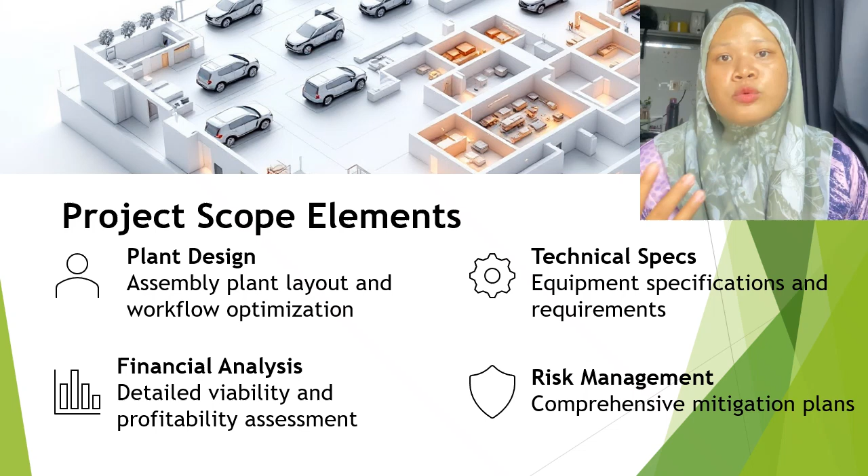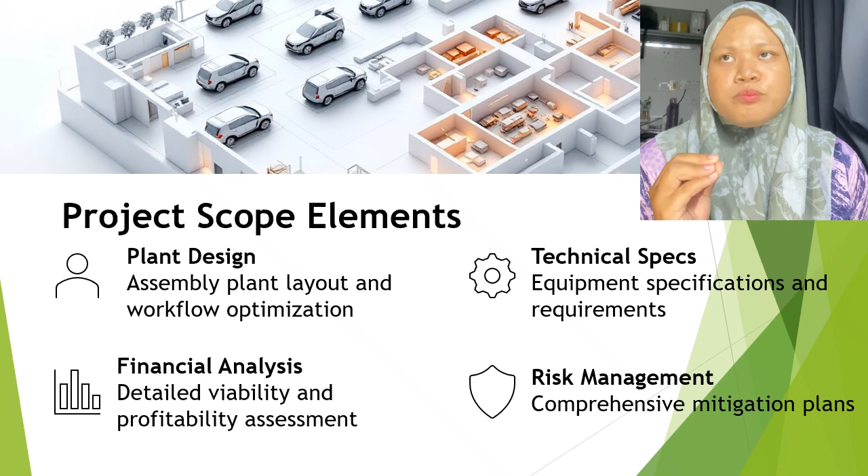Project scope elements: our project scope covers 4 key areas. First, plant design - we are focused on an efficient assembly plant layout and workflow optimization to minimize downtime. Second is technical specification - we are specifying all equipment and requirements needed for advanced EV assembly. Third is financial analysis - a thorough assessment will ensure the project is viable and profitable. The last one is risk management - we have a comprehensive mitigation plan to address potential challenges before they arise.

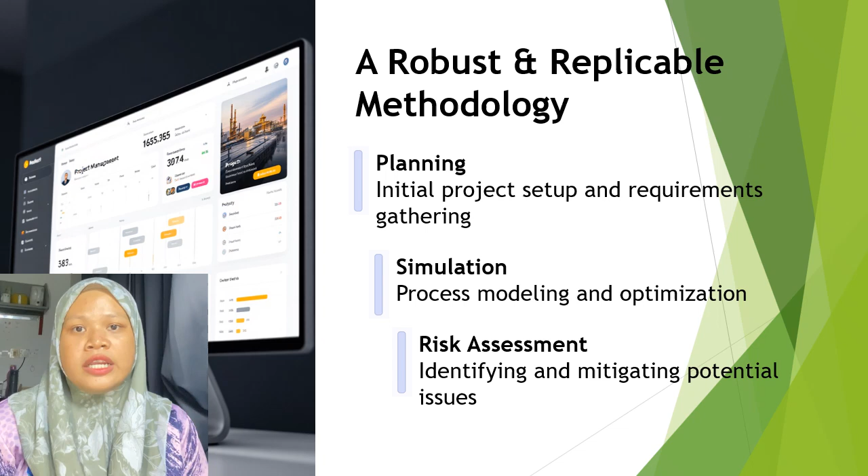A robust and replicable methodology: to deliver this project successfully, we are following a robust and replicable methodology. Planning - we start with detailed project setup and requirement gathering. Next is simulation - we use process modeling and simulation to optimize every step before implementation. The last one is risk assessment - we proactively identify and mitigate risks to keep the project on track.

Key tools and techniques: we are leveraging industry-leading tools. For project management, we use PMBOK 7th edition and Microsoft Project. For design and simulation, we rely on AutoCAD Plant 3D and FlexSim, ensuring our plant layout and processes are both efficient and scalable.

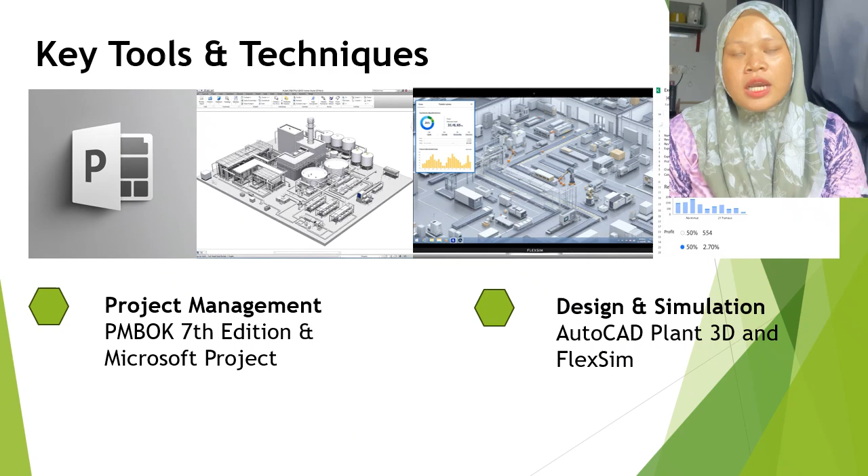Hello everyone, my name is Muhammad Jazmi Wimuledi and I'll be presenting the design of the EV assembly plant, focusing on 3 key parts: the plant layout, the essential capital assets, and the technical specifications for the major equipment used. Let's get started with the layout of the plant.

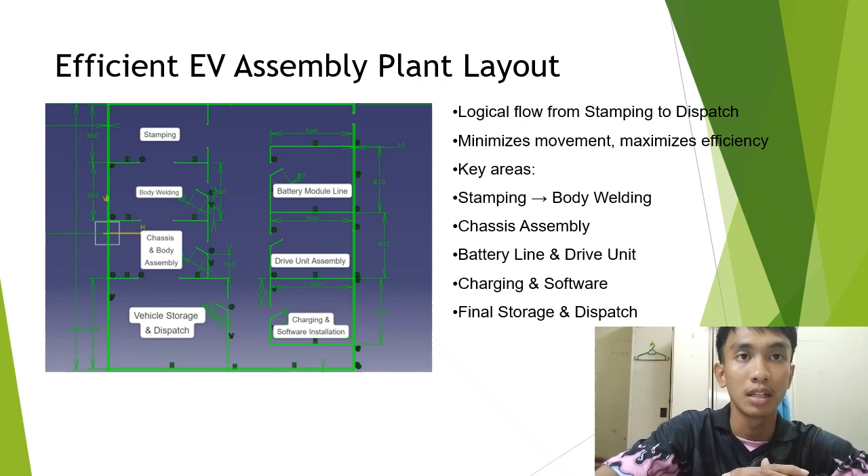This is our proposed layout, designed for a smooth and logical production flow. We begin with the stamping area for shaping metal panels, followed by body welding using robotic welders. Then the chassis and body are assembled in a centralized section. On the right, battery packs are installed, and below that we assemble the drive unit. Once the vehicle is nearly complete, it moves to charging and software installation, then ends at the vehicle storage and dispatch area. This design helps reduce production delays and keeps the process streamlined.

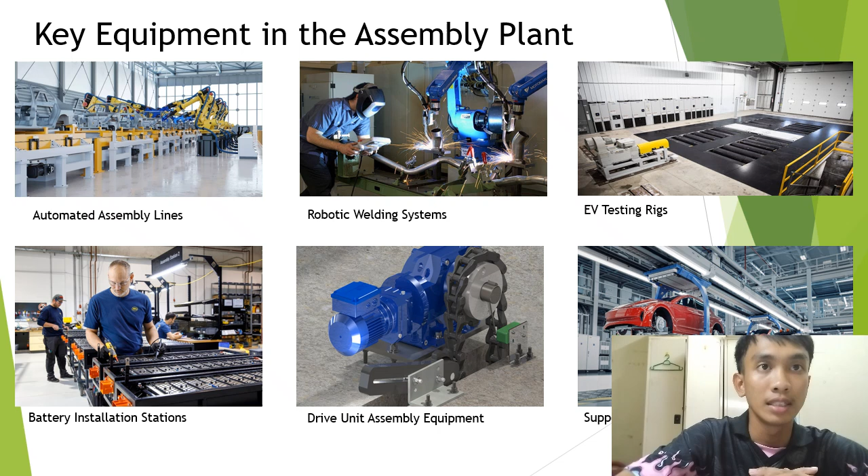Our plant relies on essential machinery to ensure safe and efficient production. We use automated assembly lines to speed up repetitive tasks and robotic welding for accuracy and worker safety. Battery installation stations are designed for safe handling of EV battery modules, and drive unit assembly tools ensure proper alignment of motors and transmissions. EV testing rigs are crucial to test brakes, electronics, and drivability. Finally, utilities like HVAC systems, compressed air, and fire safety equipment support the whole facility.

Here are the technical specs for our main equipment. The ABB IRB 6700 welding robot delivers high accuracy and speed. Battery stations are semi-automated for safety and handle around 30 modules per hour. Drive unit assembly tools help align electric motors precisely. Every car is tested for software, braking, and drivability using our EV testing rigs, supporting the whole operation.

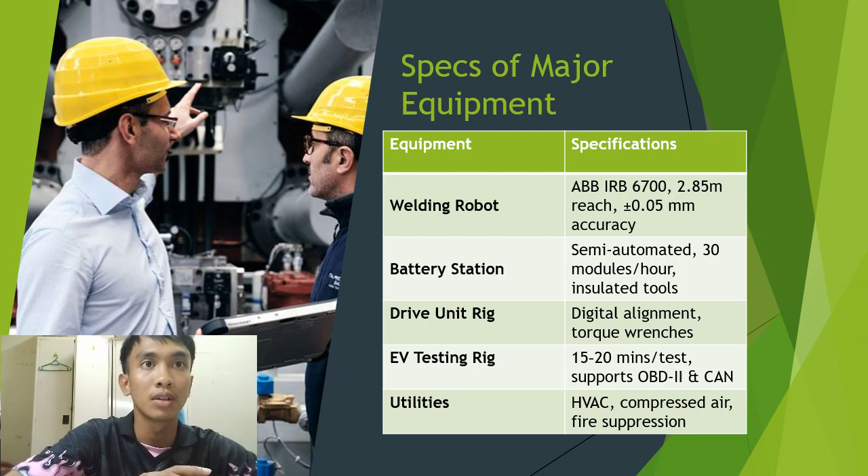In summary, the plant layout is designed for efficiency and flow. The selected equipment ensures high quality production, with automation and safety in mind. The technical specs we've chosen are based on industry standards to support high performance. Thank you for listening.

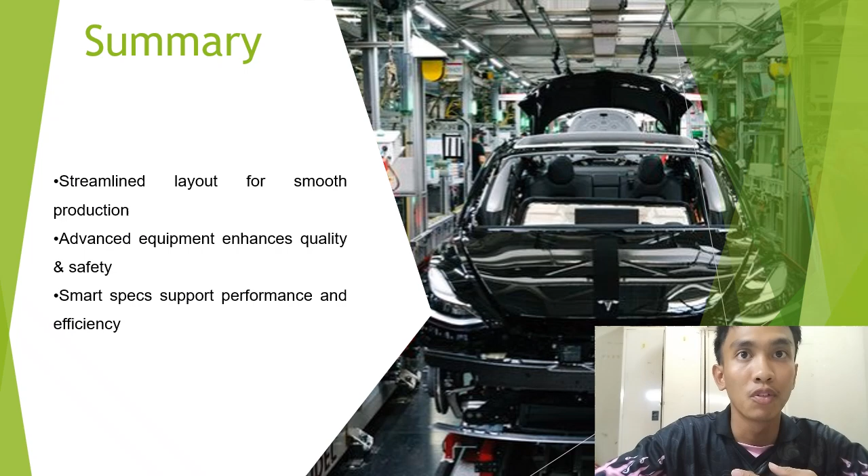Assalamualaikum warahmatullahi wabarakatuh. My name is Muhammad Hari Akmal bin Muhammad Sofyan. I will be presenting the phased implementation plan for our electric vehicle assembly facility, scheduled for completion by the end of 2026. This plan is divided into 4 key phases.

Phase 1 is initiation and planning, from January to June 2025. The focus here is on securing a strategic site with good transport, labour and utilities. Site surveys, including environmental checks, will confirm its suitability. At the same time, we will engage with regulators for licensing, build partnerships with technology suppliers, and form the project management team to guide the project forward.

Next, Phase 2 is design and procurement, running from July to December 2025. This is where the full architectural and technical designs are completed, emphasizing a lean manufacturing layout. We will issue RFPs for key machinery like robotic welders and EV testing rigs, secure supplier contracts, and begin recruiting technical staff while forming training partnerships.

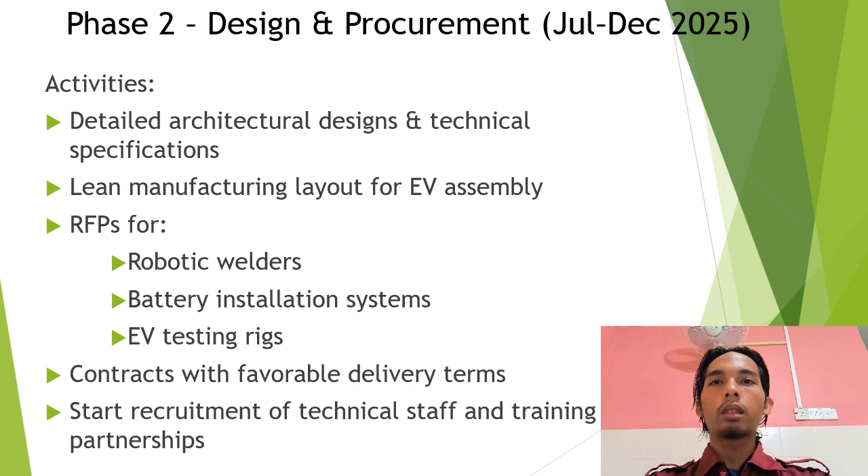Phase 3 is construction and installation, spanning January to September 2026. Groundworks and building construction will begin, including production halls, admin spaces, and utility installations. Machinery will be installed in stages alongside construction, with experts ensuring systems are mechanically, electrically, and digitally integrated for smooth operations.

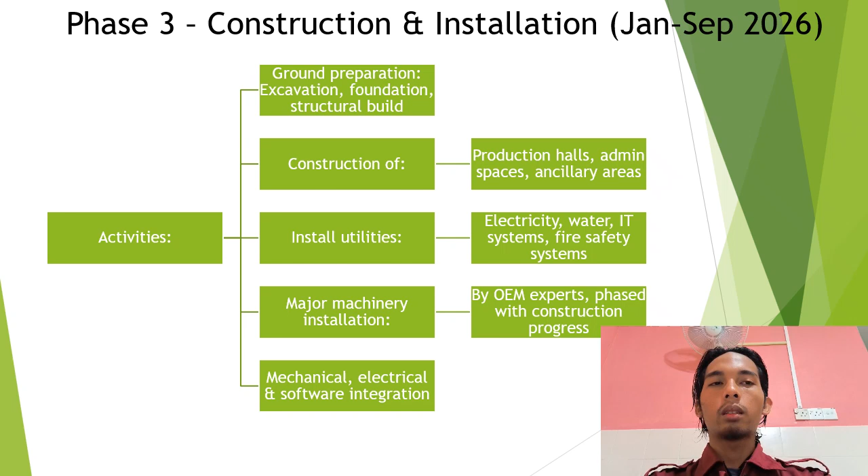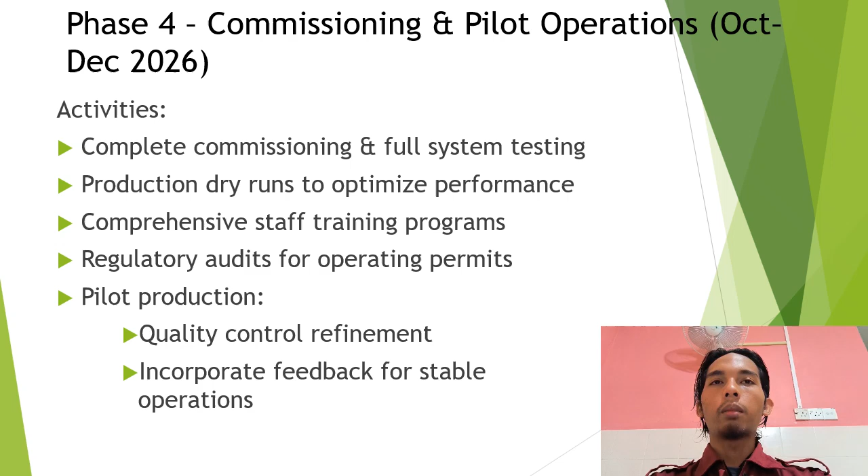Finally, Phase 4 is commissioning and pilot operations, from October to December 2026. This phase focuses on final testing, production dry runs, and comprehensive staff training. Regulatory approvals will be secured, and pilot production will help refine quality before we move into full operations.

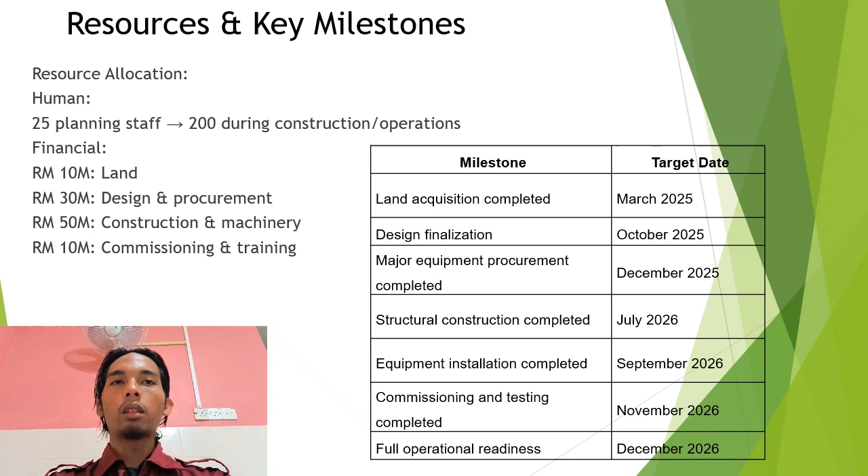In terms of resources, staffing will grow from 25 in planning to about 200 during full operations, with an estimated total investment of RM100 million. With this structured approach, we are confident of launching a successful EV facility by 2026. Thank you.

Very good morning to all my friends. Today, my name is Muhammad Zuhaimi bin Zuki, and I want to present about financial analysis in the PROAUTO final project.

My financial analysis for my EV car factory PROAUTO, firstly, is capital expenditure. All the significant upfront costs required to get an EV car factory up and running are included in the capital expenditure, such as land acquisition, initial training, factory construction and machinery.

This is the capital expenditure for my EV car factory PROAUTO. For land acquisition is RM9,250,000, including 50 acres of land, site clearance and levelling, fencing, road and drainage, and legal fees. For initial training, we include training for our workers: safety training, process and technical training, line simulation, OJT, assessment and certification.

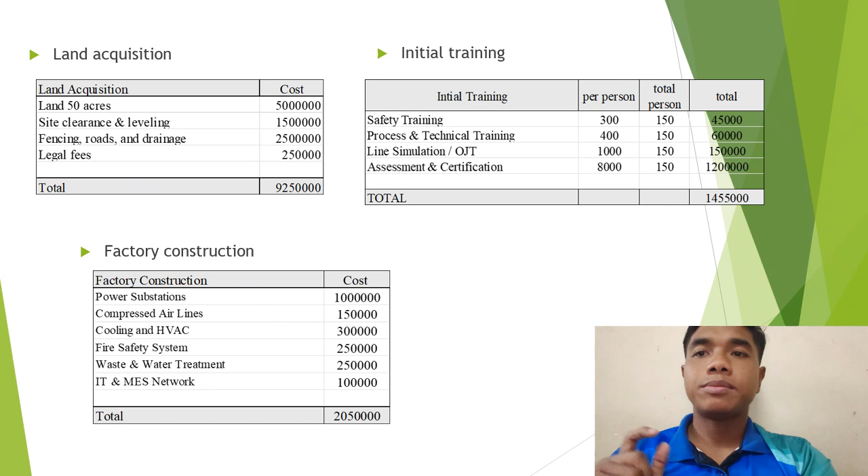This is for 150 worker personnel, totaling RM1,455,000. For factory construction, we include power substation, compressed air line, cooling and HVAC, fire safety system, waste and water treatment, IT and MES network, totaling RM2,050,000. This is the capital expenditure for our machinery.

We have 7 departments, and every department has different machines: stamping department, body welding department, battery module line department, chassis and body assembly line department, drive unit assembly department, charging and software installation department, and vehicle storage and dispatch department. All rounded up, the cost for buying machinery is RM1,459,500 — the cost for all machines.

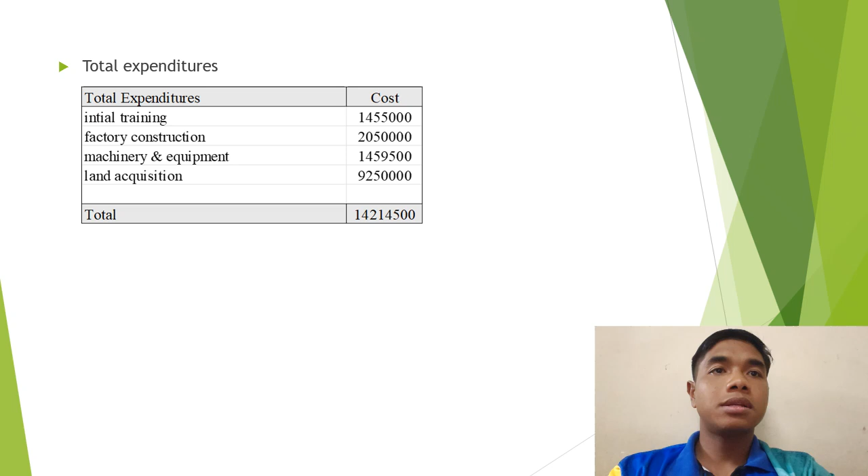So we gather up all the costs for total expenditure: initial training plus factory construction plus machinery and equipment plus land acquisition, totaling 14,214,000 ringgit and 500.

This is operational expenditure breakdown. The daily expense required to run the EV car factory are now known as operational expense or OPEX, such as monthly employee wages, monthly utilities, monthly maintenance, and monthly raw materials.

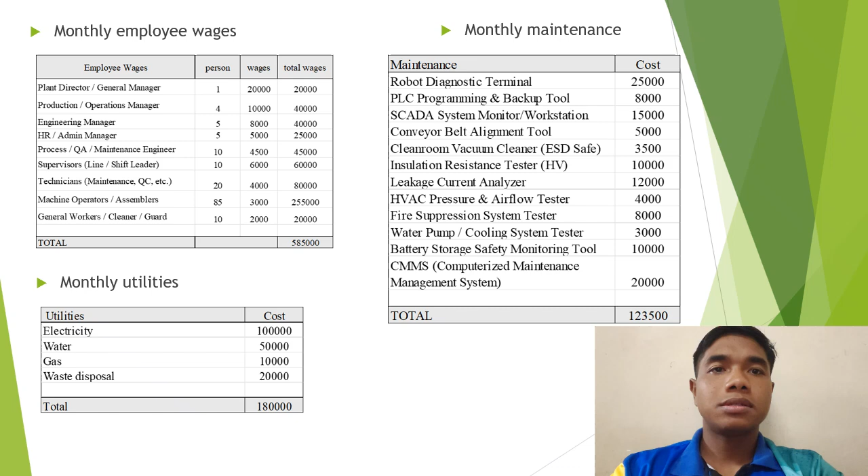I will explain more. This is monthly employee wages for our workers, which is 585,000 ringgit monthly. Monthly maintenance for our machine is 123,500 ringgit. For monthly utilities is 180,000 ringgit.

This is monthly raw material for our car factory, which is 2,698,000 ringgit. And we plus all the costs for annual expenditure is 13,360,000 ringgit for year 1, year 2 and year 3. This is our annual expenditure.

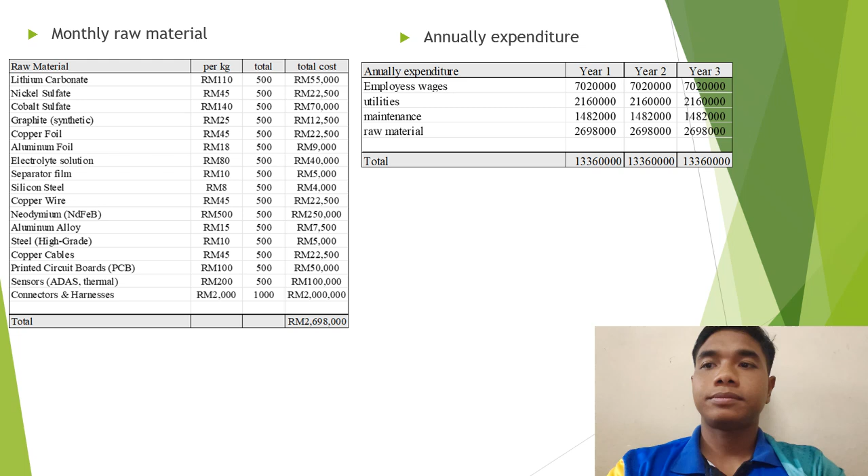That's all from me, financial analysis.

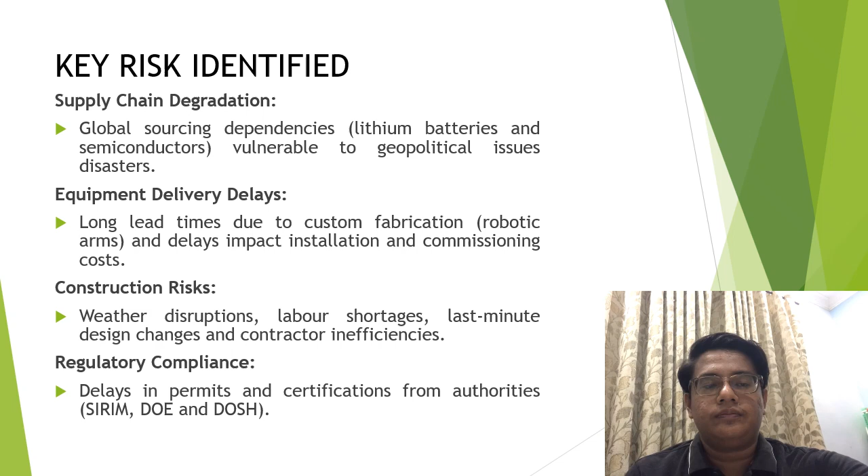And then the market and technologies risk. Firstly is market fluctuation, EV demand affected by fuel price, recession cycle and subsidy change. And then the technology obsolescence, fast evolving EV tech risk of early outdated, equipment lack of upgrade, can reduce competitiveness.

And then the compliance risk impact, delay in securing approval for safety, environmental and worker protection standard, especially for battery handling, can stall the entire project's timeline.

And lastly, the dependency on global supply, critical components like semiconductor and battery are globally sourced. Export bans, political tension or material shortage, such as rare earths, can disrupt operation and raise costs.

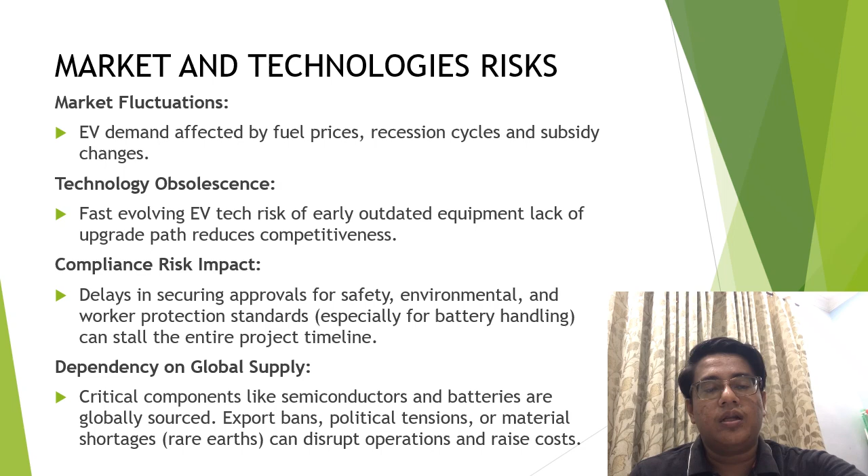And then the mitigation strategies. First, pre-qualify supplier, ensure multiple reliable sources to evaluate based on delivery performance, support and stability.

And then the modular construction, prefabricated part improve build speed, reduce on-site disruption and enhance quality control. And then the contingent budgeting, allocate 10 to 15 percent buffer for cost escalation in material, logistic or redesign.

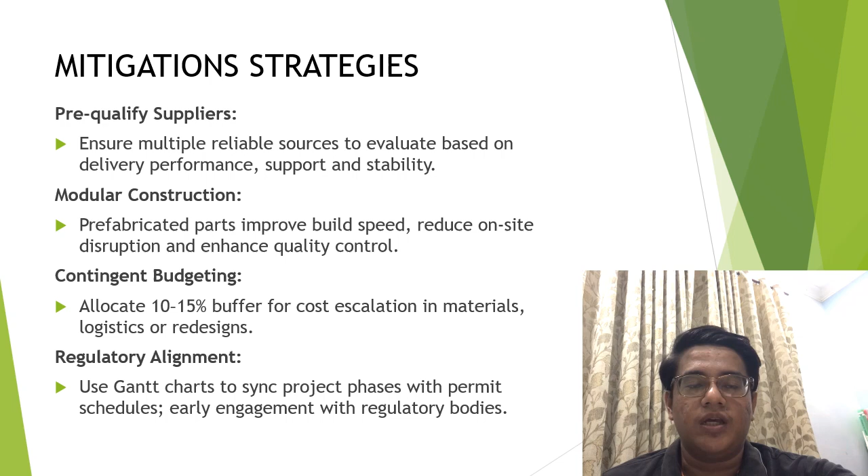And then lastly is regulatory alignment, use Gantt chart to sync project phases with permit schedule, early engagement with regulatory bodies.

And then the FMEA application, the purpose of FMEA is firstly detect failure points early, and then rank risk using the RPN, and lastly is guide mitigation step. What we can see in the table is, firstly, component, failure mode, cause, action taken and the RPN.

At the component, firstly is battery assembly system, the failure mode is loose welding joint, the cause is misaligned robot, and the action taken is optical inspection plus heat sensor, and the RPN is 168. Number 2 is high voltage terminal, failure mode is voltage error, the cause is PLC misconfiguration, action taken is triple verification plus firmware check, the RPN is 144.

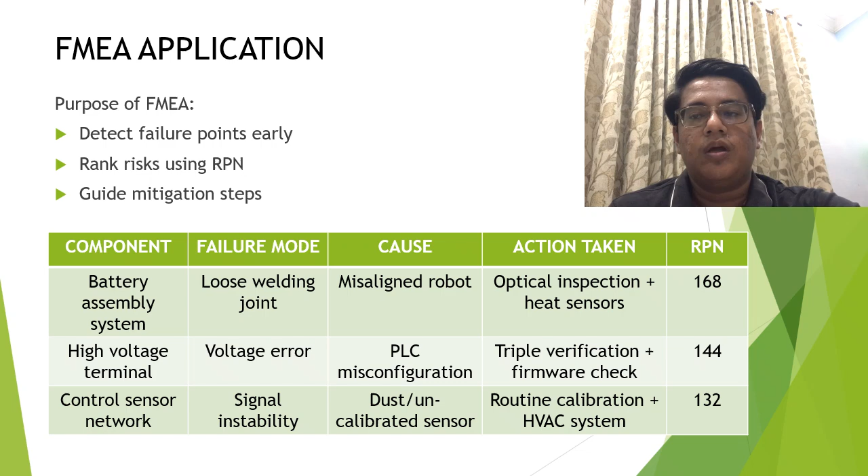And then lastly is control sensor network, and the failure mode is signal instability, the cause is dust or uncalibrated sensor. The action taken is routine calibration plus HVAC system. The RPN is 132.

To conclude, our EV assembly plan proposal is built on a strong foundation of efficient layout, advanced equipment, and reliable technical specifications. With each stage carefully planned, from stamping to testing, the project ensures smooth production flow, high product quality, and long-term sustainability. This initiative not only supports PROAUTO Berhad's expansion into the EV sector but also aligns with global